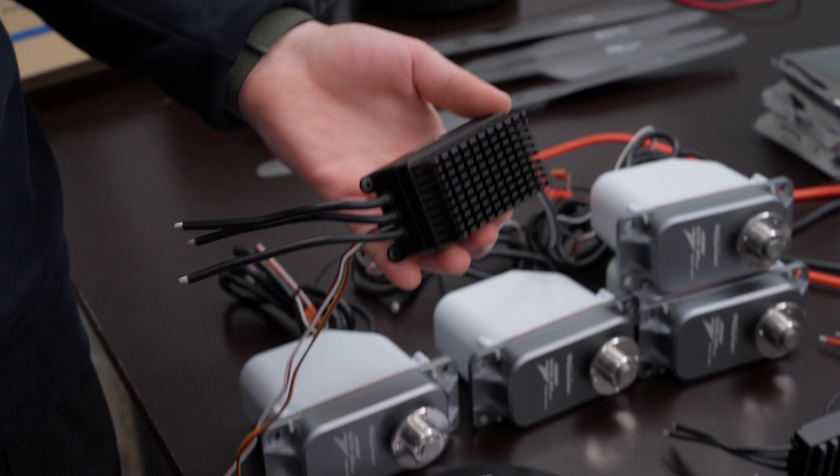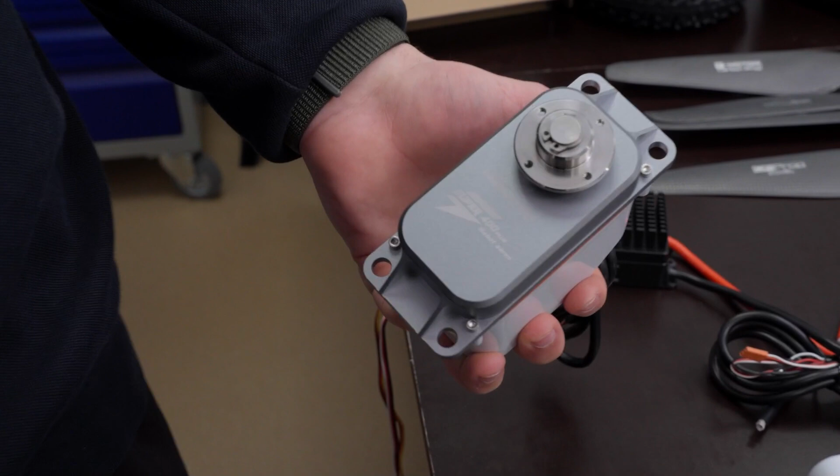as well. A controller like this one with a rated frequency of 620 Hz is also connected to it. It allows you to control the speed of the shaft. The propulsion system also uses servo motors with a torque of 400 kilograms per centimeter. The servo motors allow us to change the thrust vector of the propulsion system to lift the airship aloft. We also have 3 servos that go to the tail to change the rudder course. The torque is 200 kilograms per centimeter.

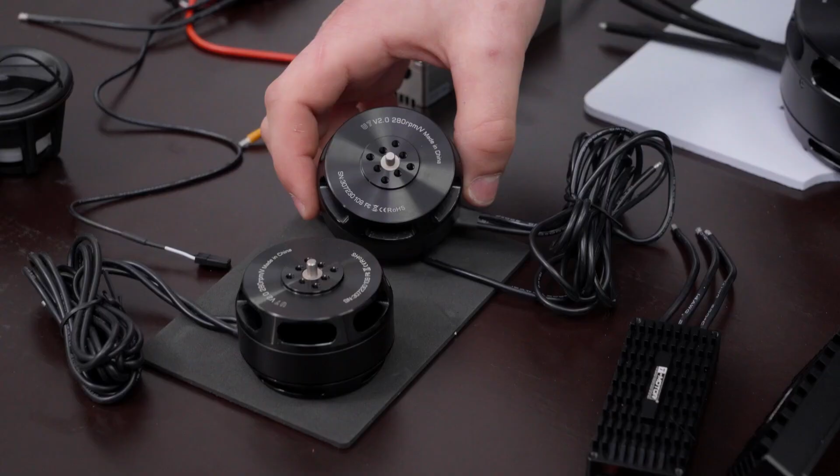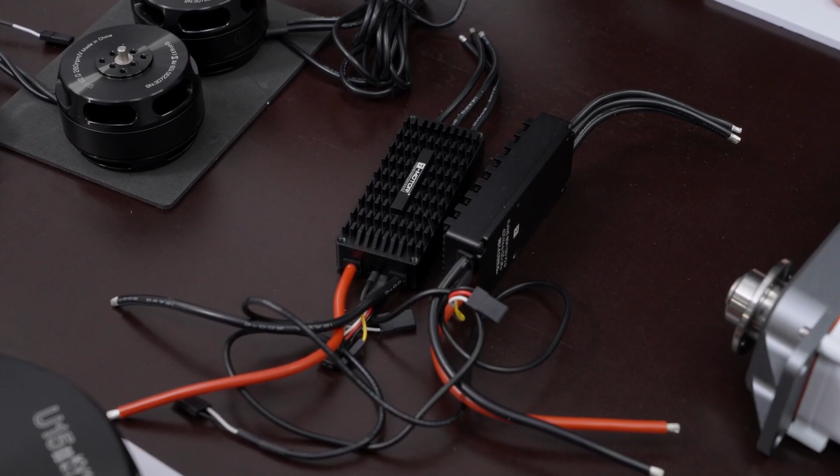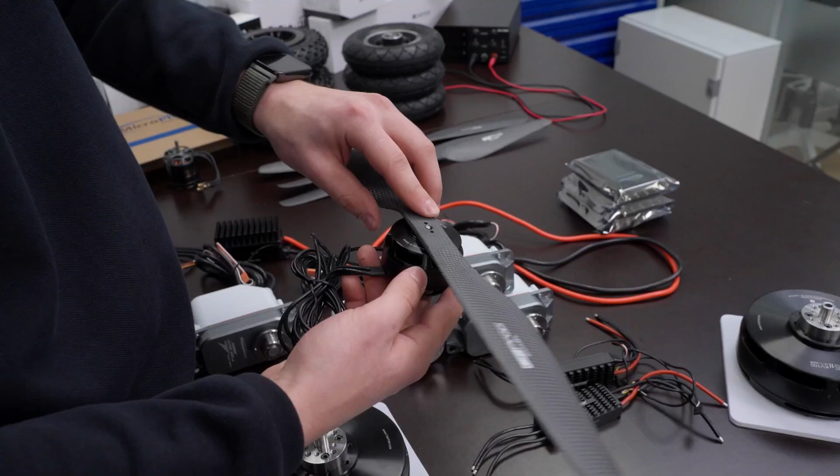The stern thruster uses 2 motors like this. They are 800 watts, which is about 1 horsepower. We use these controllers on them. They also allow us to control the speed of the shaft. The motors and controllers have a higher IP57 moisture protection. We use these propellers on the stern thruster. Their length is 500 millimeters. They rotate at a speed of 3 to 5,000 and their thrust is 10 kilograms.

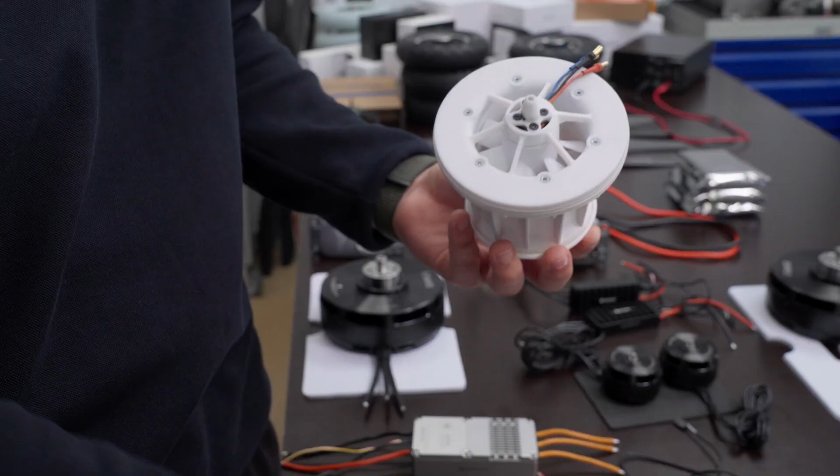Next we have the air and gas system. This is our refueling valve. Thanks to it, we fill helium into our airship. Also in the air gas system we have an air feeding unit. It has an electric motor in it. And we connect this controller to the electric motor, which also allows us to regulate the speed.

In the chassis we will use fiberglass tubes due to their mechanical characteristics. It's very simple, they're very light, strong and easy to bend without losses and cracks. We will install wheels on them with a self-orienting mechanism. We will carry out defect analysis and replace elements at the wheels. We have also received samples of fabric from China, also domestically produced. Now we will test them in laboratory conditions and we will make shells of the unmanned airship from them.

Here we have components for the onboard computer. It will be produced in the number of 3. One is reserve, one for the airship itself, and one for ground control. Here we have motherboards, RAM, M2 drives, and processors.

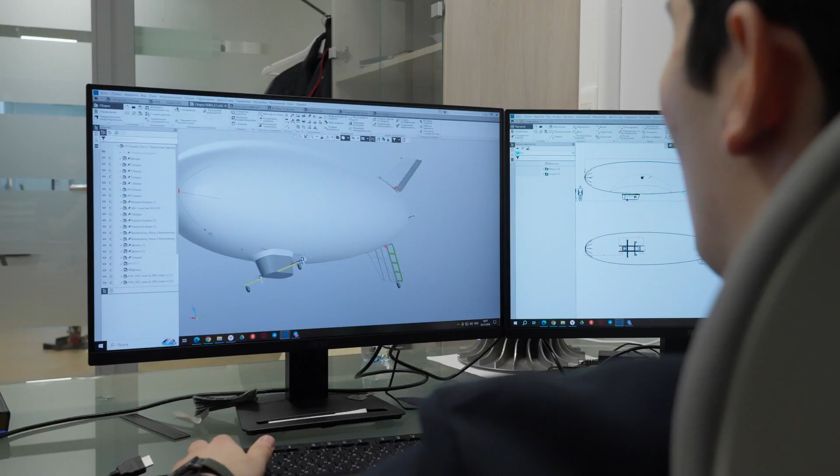Now I'm going to show you a 3D model of the Nova 01 airship. It will be 130 cubic meters. I'll show you the rudder turning mechanism. Here is our servo drive with a torque of 200 kilograms per centimeter. A mechanism for transferring motion to the rudder itself. We also have our wheel here with a self-orienting mechanism.

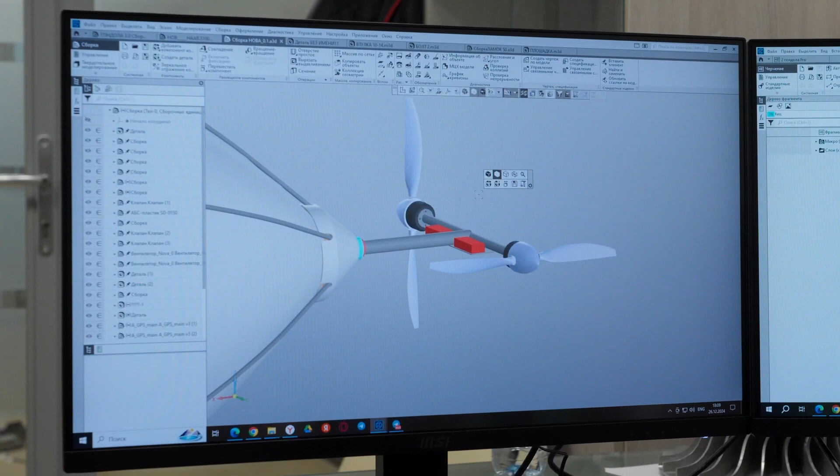On the stern unit we will have 2 electric motors, thrust propellers. Black color indicates our electric motors and the red color indicates our controllers. Thanks to these units we will maneuver and navigate. Here we have the propulsion system. Here we have our 2 thrusters with controllers inside the fairing. By changing the position of the marching motor, we can change the thrust vector.

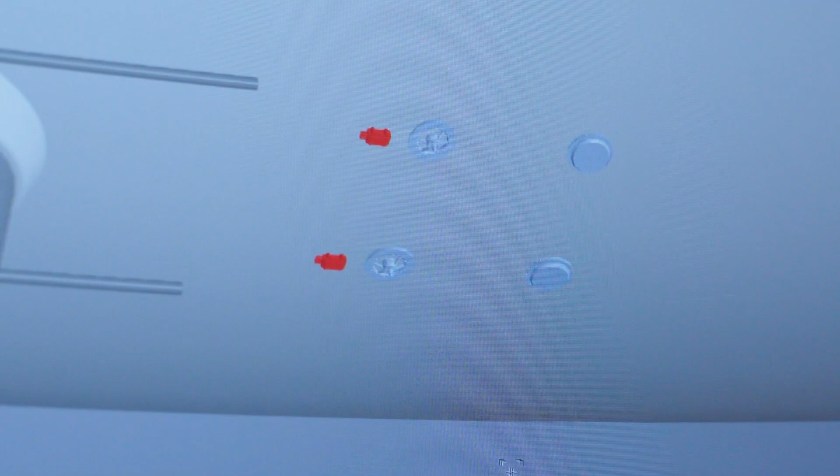The airship will have an air gas system on it. It is depicted in detail here. Here we have the air feeding units. Here we have the air release valves. They will inflate the balloon inside the airship, which allows us to adjust its flight altitude.

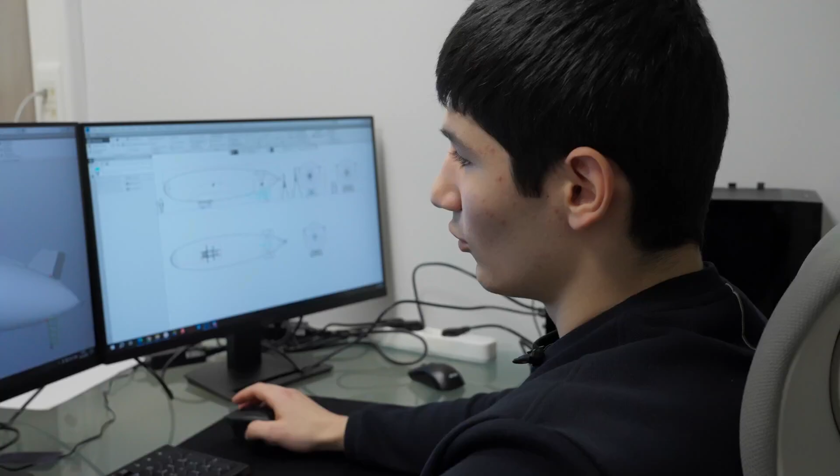Actually, the airship is completely ready in the layout of the 3D model. What remains to be done is to coordinate everything with the management and start manufacturing. We are rather making Nova 01 for testing production technologies. The airship itself will be at the height of 500 meters and fly at a speed of up to 80 kilometers per hour.

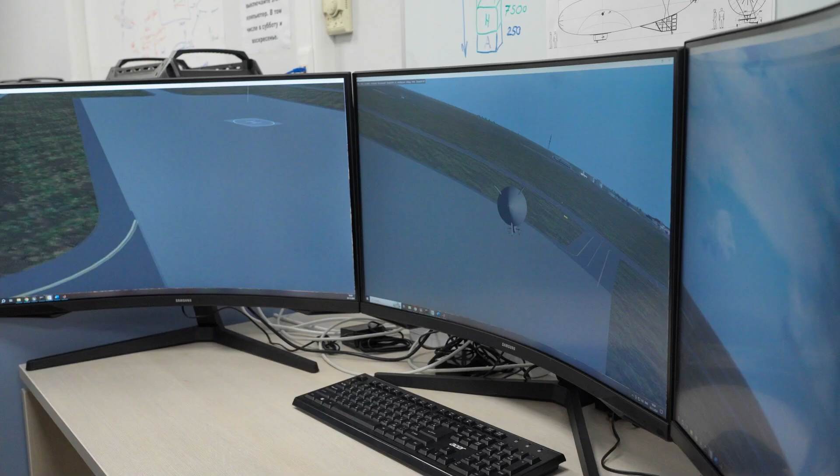We have manufactured a simulator for flying airships. The simulator allows us to practice landings, takeoffs, and also to understand the physics of flying our airship. This simulator allows future pilots to understand all the mechanics, all the physics of our airships, because all these parameters are incorporated here. We can edit the wind speed and its direction.